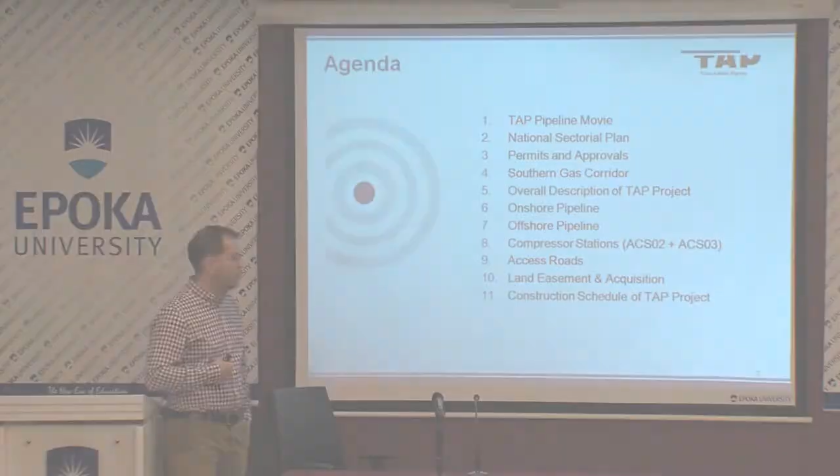I took this presentation because two weeks ago we finalized the overall compound development permit, which is the first step of getting closer to construction of the project. So it's a bit of data, I'll get you bored on this first one. The second one is more interesting because it has more pictures, which is the offshore part.

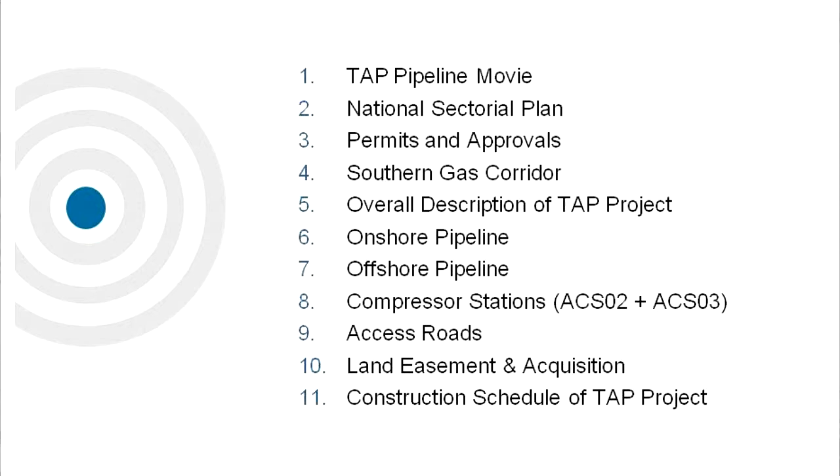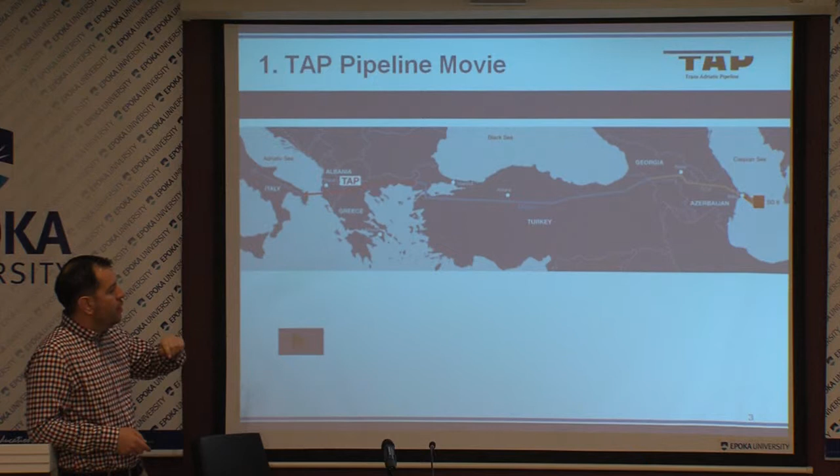So as we discussed, as I said, Shah Deniz II, it goes to Azerbaijan. It runs through Azerbaijan, through Turkey, Greece and Italy. This is what we've achieved so far on the project, which is the planning and the permitting.

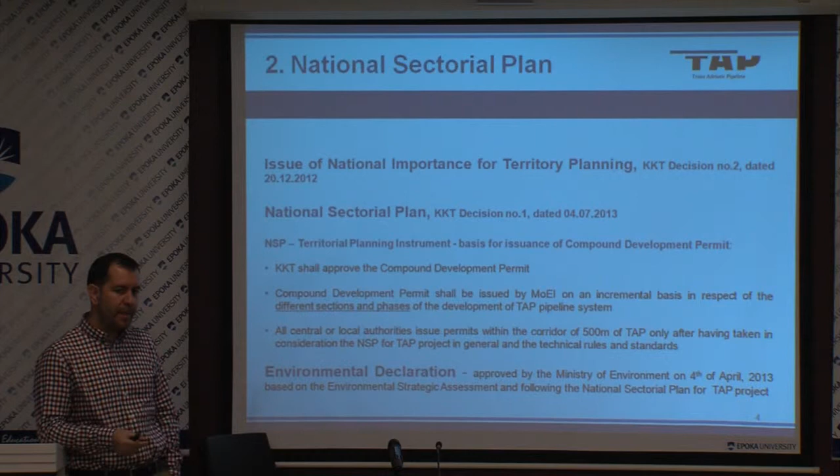You should know that in civil engineering you don't learn these kinds of things in permitting, especially because permitting is a little tiny bit where you have a construction permit, and it goes into helping you know what is the legislation in the country, what can you do in the country, what is allowed and what is not allowed, and this is what permitting does. So it's a bit of civil engineering mixed with lawyers.

This is another potential route which you guys can take in the future, because you should know that this kind of thing is in a bit of shortage in the current Albanian market and the Balkan markets.

There is more focus into the civil engineering. The civil engineering shouldn't be only civil engineering. It should have a bit more of a 3D view of it, you know, like a bit of economics, a bit of law, which, you'll see, if you have this, you are a bit different from the normal market.

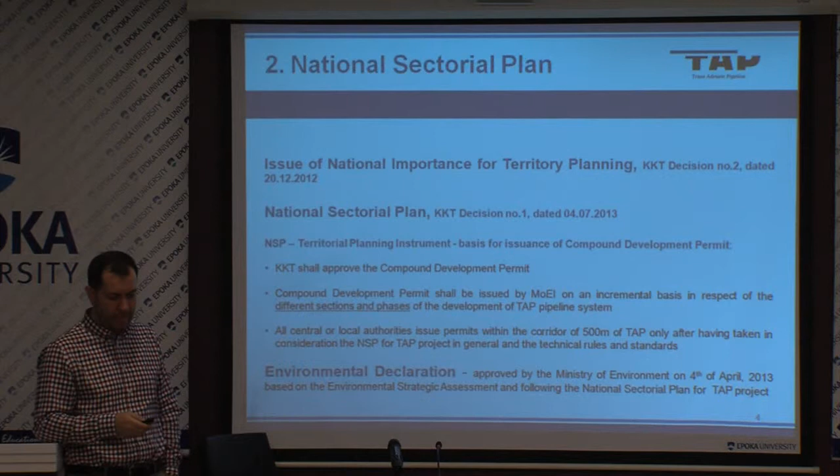This is again some permitting, environmental permit, which is quite important. Big companies, they take so much and spend so much money on environmental and health and safety, which again in civil engineering, where you are, it's not only in EPOKA, but I guess it's all universities.

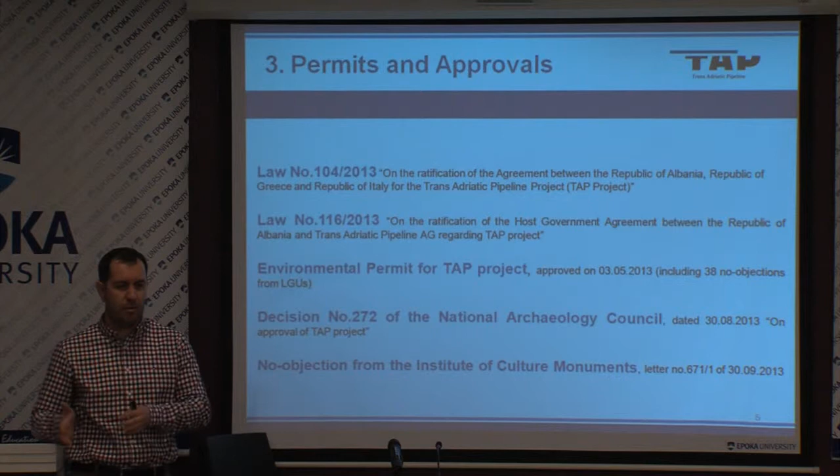Even in my university in the UK, they didn't mention so much environmental and health and safety, because they want you to be very rigid civil engineers, and they leave it up to you what you do with a civil engineering degree. So they give you the core of being a good civil engineer, but then how you mold it around to give it the shape of the real market needs, a project manager, a construction manager, it's up to you guys how you do it.

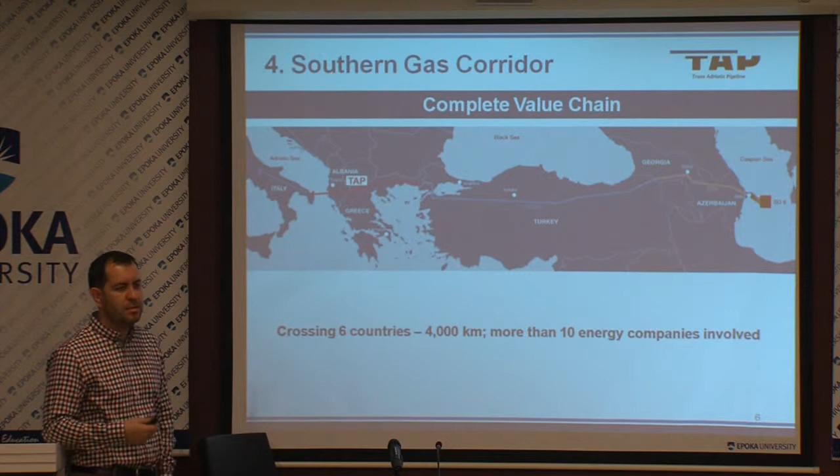So the reason why I brought this up is that this actual project is like a motorway for gas. It's not a motorway for cars, but a motorway for gas, which means that we will do all the blocking of the valves and give a go-ahead on where it stops, how we divert the gas. This is more likely, if you see it in an overview, a motorway of gas.

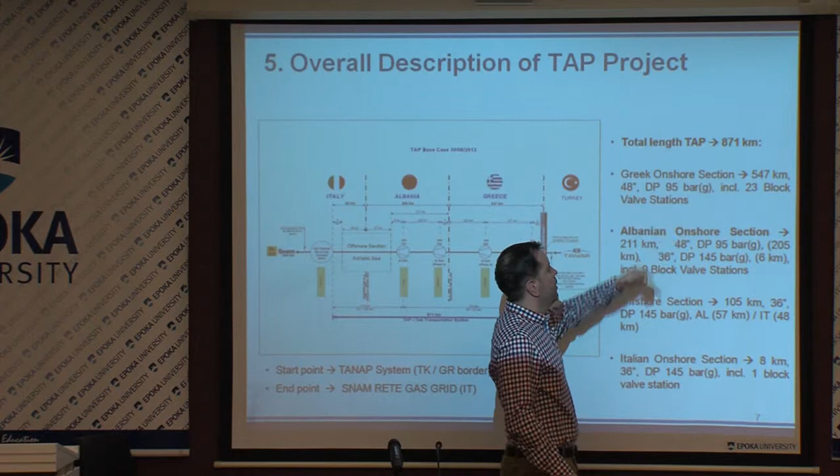I mentioned earlier that this is not only a mechanical engineer project, but is also a civil engineering one. Where does civil come into it?

Civils come into the way the pipeline is going to be placed. By knowing how much bars and what risks it has on installation or production of pipes or gas flow into the pipe, civils help to determine the bed of the pipe, which is quite important, the characteristics of it.

For example, we have selected 6 options to complete this pipeline. Out of 6, we have filtered 1 option. The reason why we did that is that we analyzed all civil impacts to the project, a good example being geological conditions. You've got to know where you put the pipes - if it's active faults, non-active faults, if it has a history of landslides and all that kind of stuff.

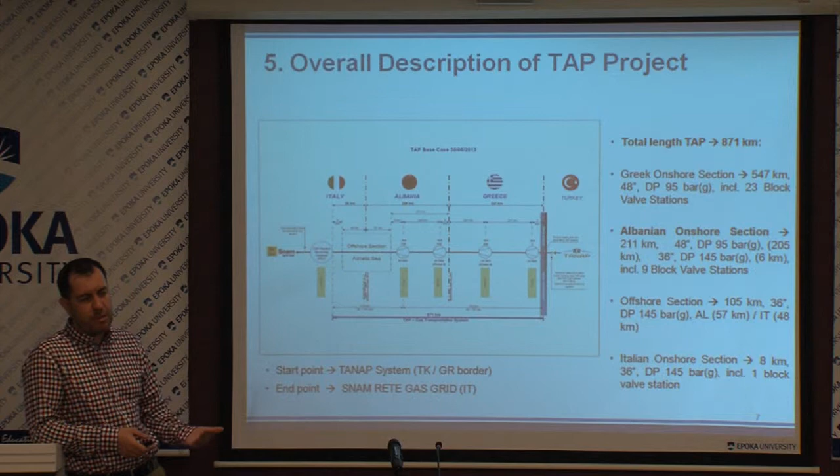These are again some characteristics about the project, basically the safety elements to the pipes. The safety element is, for example, if there is a change in weather or temperature - we have a temperature range for the weather conditions, which could be 44 degrees and up to -5 degrees.

If we have a change in temperature which is more than 44 degrees, then we put in block valve stations, which are put every 20 kilometers. What they do is, as pressure changes because of temperature, since it's a gas, a gas can change its volume depending on temperature.

These block valves will help stabilize the pressure within the valve. For example, if it's overheated, the pressure goes up, then we let some gas out of the 2 block valve stations. If it's wintertime and the temperature is -5 and it goes below that, then we call in and heat up the gas so that it has the same volume throughout the traveling from A to B.

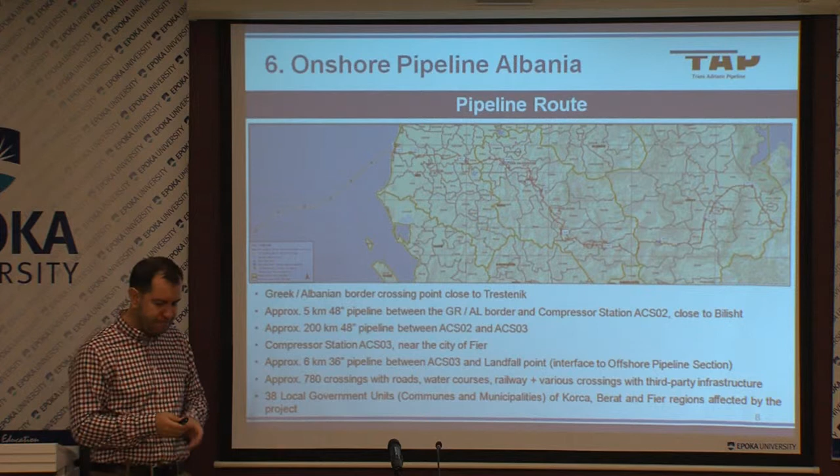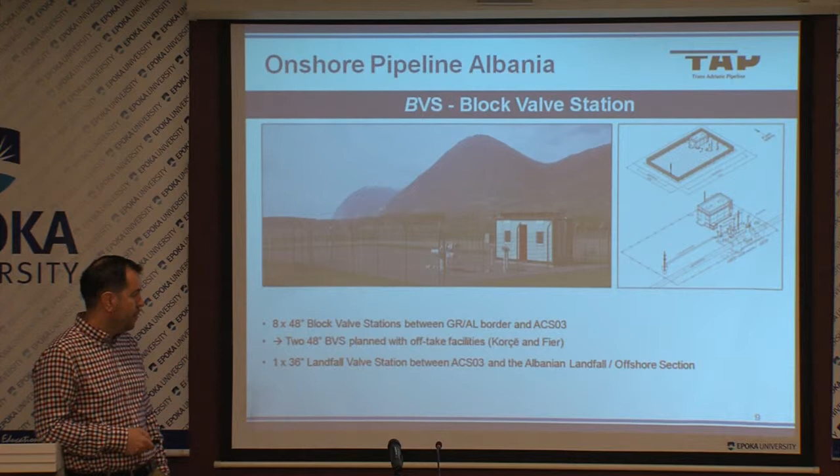Knowing that you need to do a pipeline project, you know that one of the major characteristics of a pipeline is too many pipes. What do you do with them? You store them. So again, another concept of civil engineering is the logistics behind it. If you're a good civil engineer with a road background, you could help shape up the logistics study, which is quite important because it has more than 10% impact on the overall money spent in the project.

Campsites - that's another point where civil engineering comes into it. How does civil engineering relate to it? Well, again, it's the geological condition, it's the urban study.

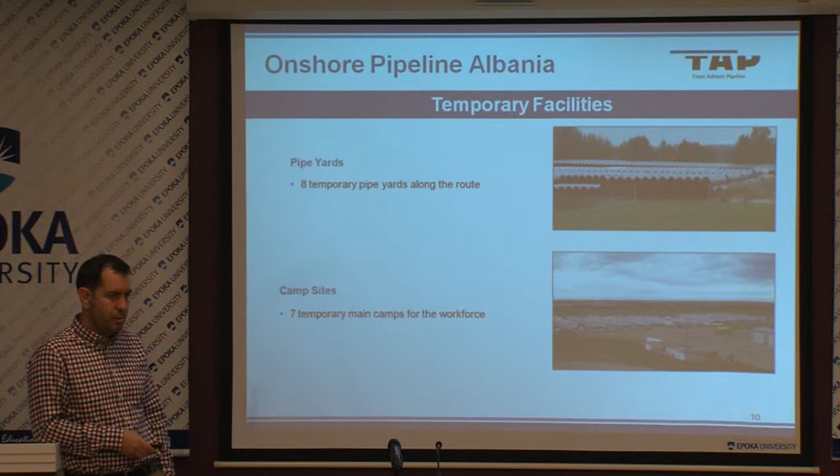How many cars will go into that area where you'll be selecting a campsite? How many people are in that village where you're going to put in a campsite? Are you affecting these people's lives? So again, civil engineering needs to have a bit more side views to the planning and preparation.

And how do you do that? You select the base case, which is you select the corridor based on all civil engineering and other aspects when you select the route.

Then you prepare it and make it nice and tidy just for the mechanical guys to come after you, put the pipe in, and then civils take over to cover it up, making sure all the risk factors are kept to where they should be.

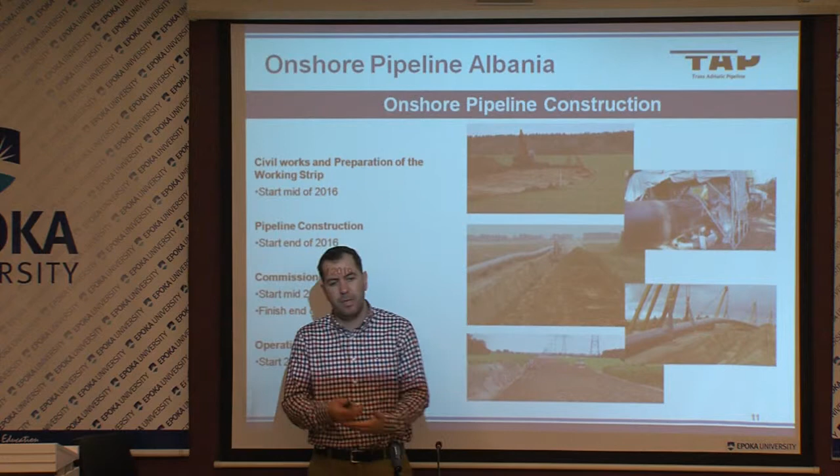Again, this is the environmental part of it. Whenever there are big projects, there are more of what we call stakeholders - people representing governmental bodies, like a directorate in agriculture, in the area, for example Korça, where the pipeline is going to go through. We need to make the project with as little impact as possible to the communities.

That means that your engineering now needs to take another shape, which means that you don't only see it as diagrams. You got to know when you put the diagrams and the design, you take into account other factors, which is community. In our case, for example, we'll have super duper engineering, but when we put the pipe in the ground, we take another turn.

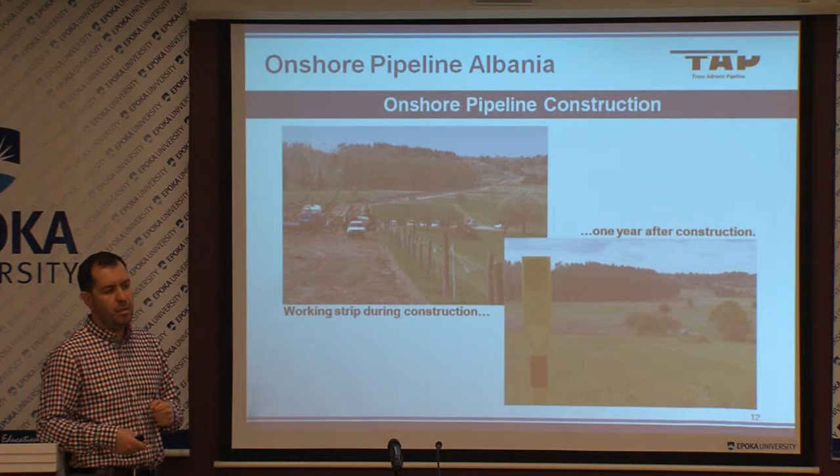We use civil engineering and we use the community liaison, because we know that this pipe is more than a 25-year project, and we want to have good community relations, because we have to do maintenance. God forbid if there's an accident, we have to take necessary measures and use the community, which are to our advantage, not our disadvantage.

Another challenge to this project, and I want to tell you something that's quite new for me, is land easement and acquisition. But I learned on the project, because you should always see yourself like a sponge, digesting and gathering more information from experienced people. We have one challenge in this project, and it is land easement acquisition.

What does that mean? It means that when you design a project, another factor is that you need to have access to this land. And how do you do that? Well, you have to buy the land or rent it out.

Unfortunately, in Albania it's the wrong example, because we have mishmash with our cadastral data, which means there are so many laws on registering your property, and you're lucky if you have your own certificate of property ownership. What we are doing is rebuilding the whole cadastre from scratch with our own money.

This affects more than 12,000 people. That's a big number, and you've got to talk to 12,000 people one by one, because you have to check whether they're the right owner or not. Why do we need that? Well, we need that because we need to construct our pipeline.

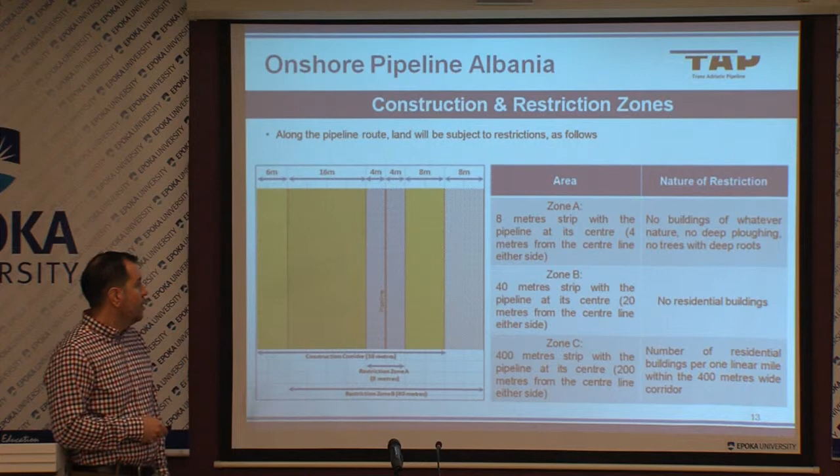This is the onshore part. Compressor stations are another factor to the project, which manage the pressure on the gas, and these help the block valves, like I explained before, to have a constant pressure in the pipeline. You need a constant pressure because if you have an irregular pressure, it means you will spend more money on maintenance.

And the maintenance in a gas project is quite expensive, because the pipes on their own are expensive, the welding on its own is expensive, the installation on its own is expensive. So imagine you will have to do this whole circle again if something goes wrong with the pipes. And normally the lifespan, when engineering considers the lifespan of the project, normally

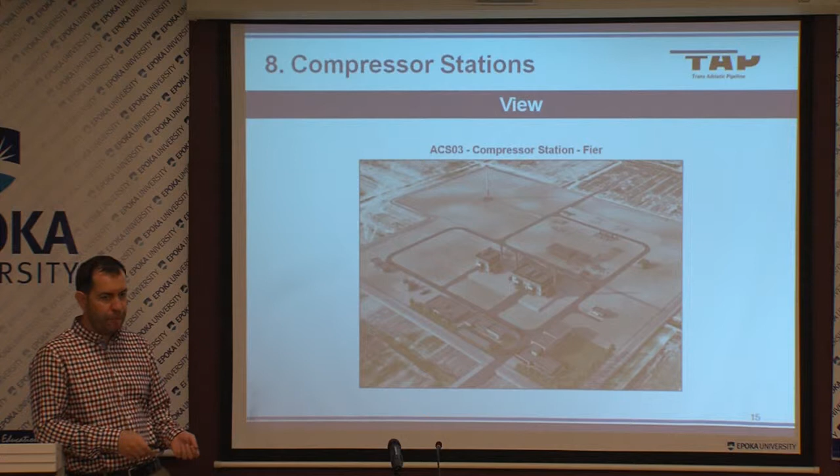this type of project will go for more than 25 years. The engineers who design these kinds of projects, it's their duty to match the quality of the material selection, the type of construction, and natural causes such as rainfall, for example, and heat. All these elements go into the design and give you a final product, which is a pipeline for 25 years plus. So this is what you'll be doing one day. You never know.

Before we construct, there is a logistics part of it. Especially in a developing country like Albania, there aren't many roads where we can take the pipelines. We are talking about pipelines 18 meters long, which would need a typical truck of 22 meters, and they would turn into roads with a radius of less than 5 meters. This is a big challenge.

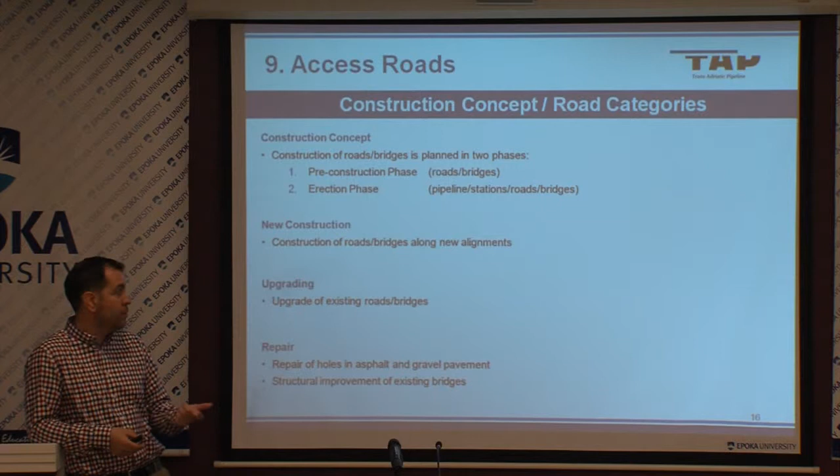What the company has decided and taken into calculation during the design phase is that this is our cost, because it has a direct impact on how fast we can progress with the project and how fast we can construct it. So what we are doing is designing roads, more than phase one, more than 194 kilometers of roads which we will upgrade and renew.

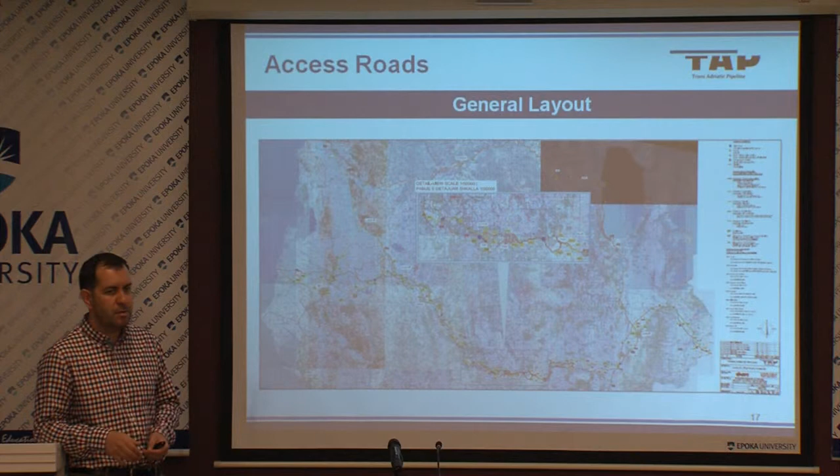There are existing roads right now with a width of less than 3 meters, used by farmers with little tractors going to the farmland for day-to-day business. But these are not enough for us. We need more than 5 meter width. So it's our cost - we have to design them based on geological and other conditions, and make them fit for purpose for our project. In total we have 57 kilometers of new construction, and 44 kilometers which are existing, so all we need to do is make those good for our logistics purpose.

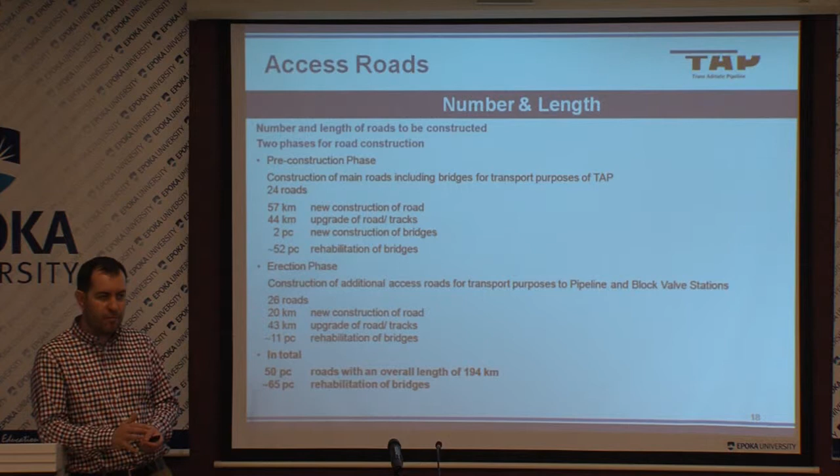On the way we noticed that some of the bridges we'll cross are not enough to withhold our tonnage - a typical 22 truck is 40 tons, not the average truck you see on Albanian roads on a normal day, which is normally 22, 25, 30. So we have extended this design scope and will add another 52 bridges, rehabilitating them to make them good for our purposes, and then once we finish, we will give them as a gift to the government.

On top of it, we will go through 655 kilometers of roads we will use. This is a basic estimation. So these 655 kilometers that we will use, we have put them under a monitoring regime. We will do an initial assessment of the roads from a civil engineering point of view. We will go back to the road authority and tell them: look guys, this is the condition we found them in. If we damage them, we will maintain them and put them back to the previous condition they were in.

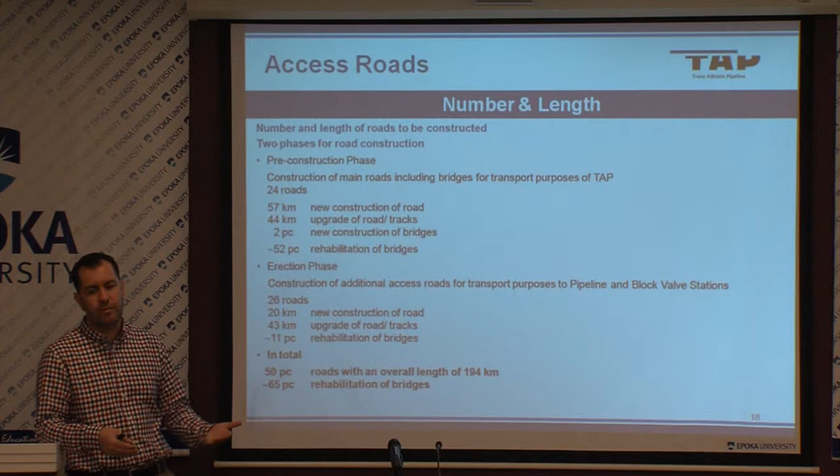This is a typical road design that you should be encountering in your life after university.

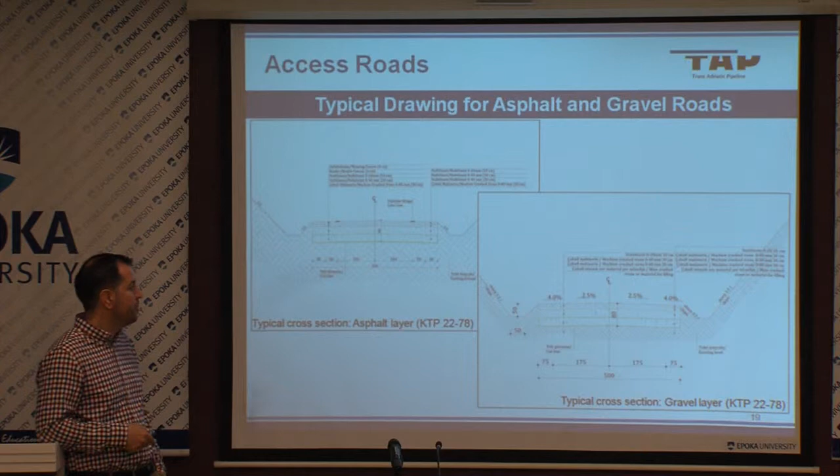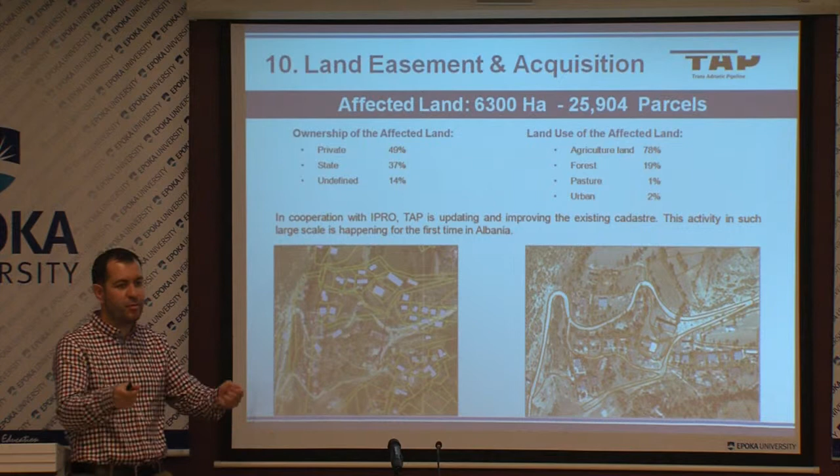These are our time schedules.

As you know, being an engineer, there are three main subjects encountered, and I would say these are just the principles of any discipline in engineering: quality, time, and cost. These are like a triangle. You're lucky if this triangle is...

So you always have to make sure this is in line with all the tasks given to you, which has an impact on the overall project. Typically, for example, it's the designer of the roads - we gave our designers a timeline for when the roads need to be finished based on when construction of the main pipeline will be finished. So what the designer does is pick the deadline and work backwards, doing all the planning, geological and other studies, environmental, hydrological, you name it, until he reaches the deadline and hands in the project to us.

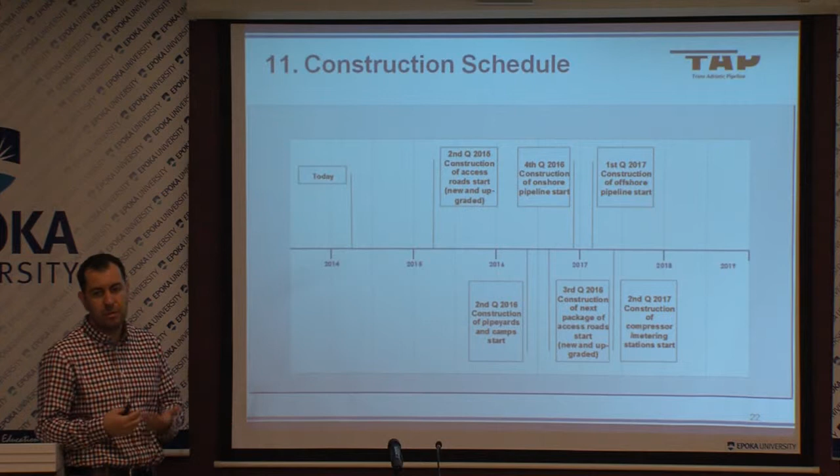Normally in a normal working way, you always see that the time schedule will always change. Planners, some of whom come from a civil engineering background, always plan with a buffer zone. For example, if the deadline is third quarter of 2016 for the next construction phase, officially that's what it tells us, but in his head the planner has reserved a quarter extra, because the world is not perfect. We know there are delays. All these filters within a company - a planner, an engineer, a designer, a project manager - match their efforts so the project can be delivered in time, within budget, and within the requested quality.

Now I'm going to show you the offshore part, which is quite interesting. The onshore has many unknowns, but these are foreseen unknowns. The offshore is more challenging because it has unforeseen unknowns during the design phase, and these details could go up to the salinity of the water.

How much salt does the sea hold when you select the pipes you want to install? Is there any active faults in the seabed? How deep will the pipe go? I don't know how much fish movement there is. These are even ridiculous things, but they do take them into account, because these are all factors which should be considered when you design a pipeline.

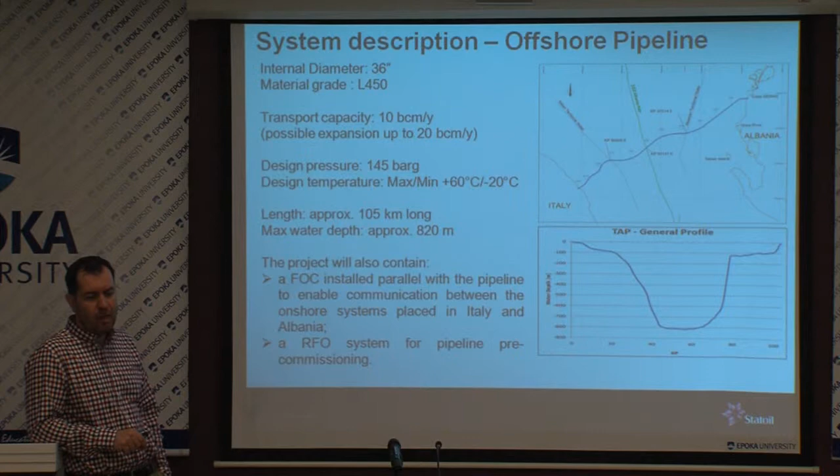The way we install the pipe is with a normal steel pipe which has a smaller diameter than the onshore part. Why do we do that? Because we know there is much more pressure when you go down, and our depth is more than 820 meters deep. This is close to Otranto Bay, if you are familiar with it.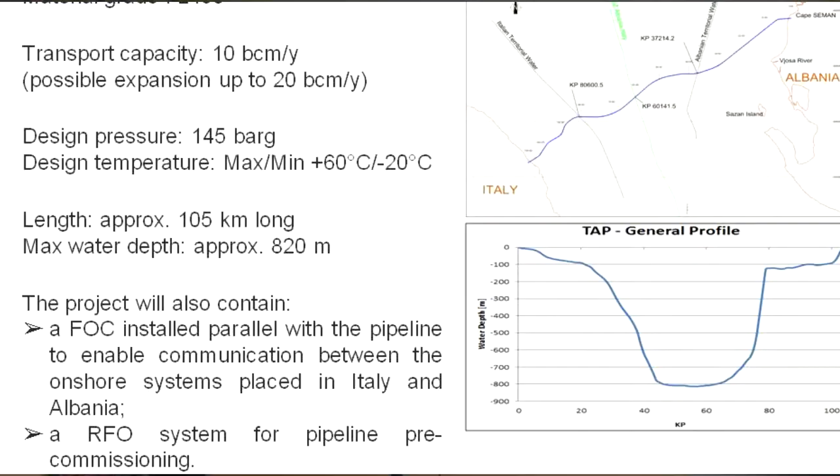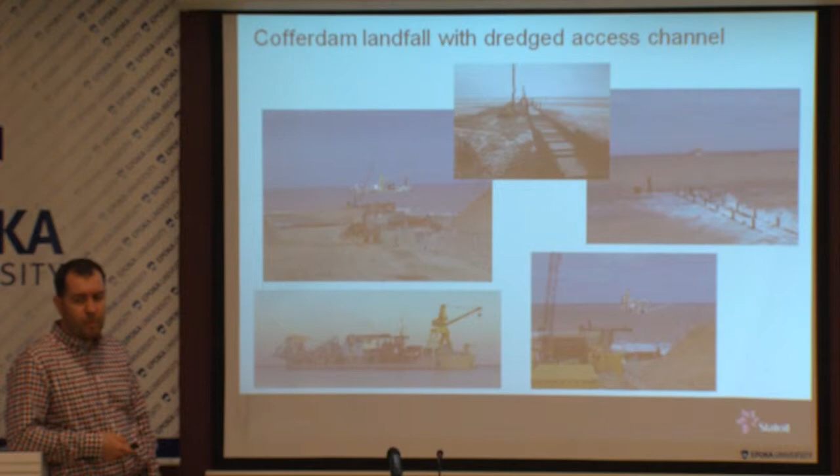We install the pipe and coat it with a concrete cover, which I believe is 25 millimeters, so 2.5 centimeters. This is special concrete, because the pipe has to sit on its own on the seabed. We will not make any clamps onto the pipe, so it stands on its own.

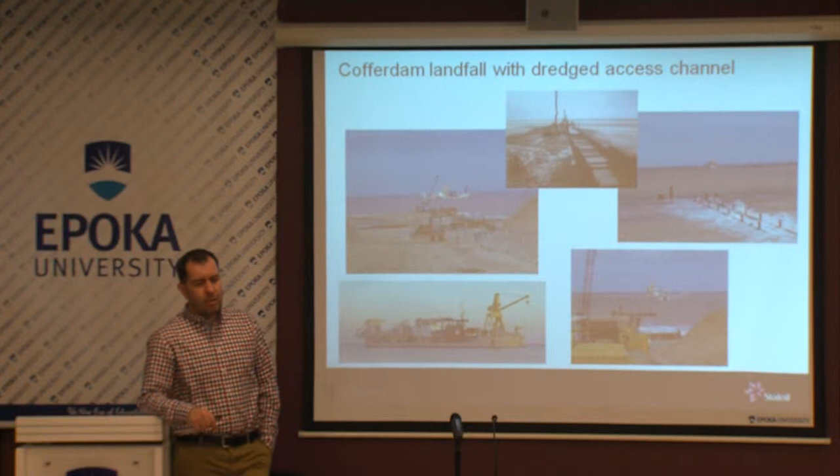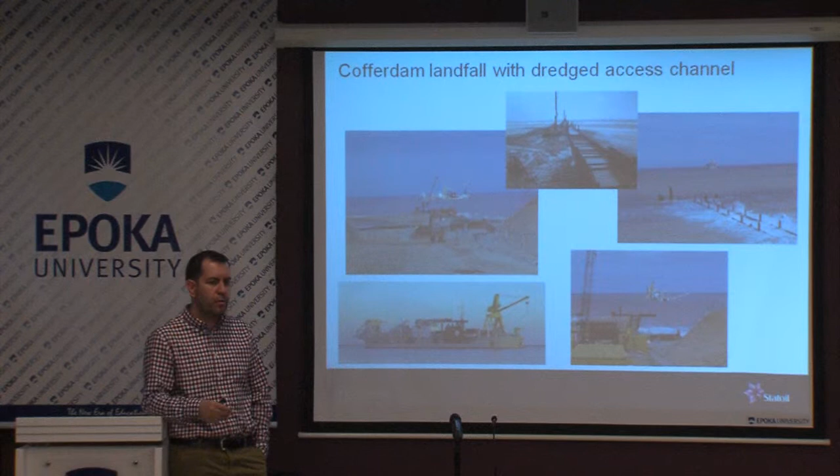This calculation is made in a way that it will withstand all the unforeseen risks, such as water currents. Water currents are quite known in seas and oceans, you name it. We are quite lucky because we don't have many. That's why when we take the design measures, we take into account even water currents, but at a lower risk than if the project were in an ocean, which has much more currents.

And how do we do it? We go up to Seman, which is close to Fier - it's a nice beach area. The pipeline, before it goes into the sea, is stored in a place called landfall. What is the landfall? This is a connection between the water and the ground, the onshore with the offshore.

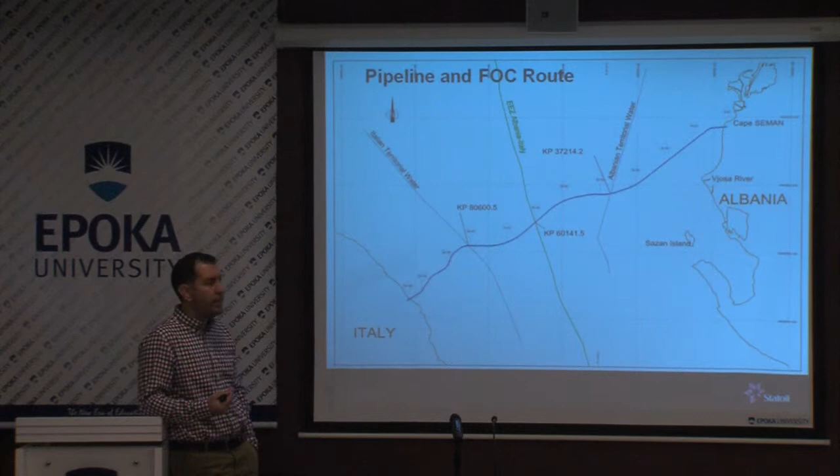The connection is made by a methodology called cofferdam. As you see here, you have steel sheets installed in the ground with a corridor of 4 to 5 meters width, where people and machinery can work within the corridor. This goes into the offshore - in our case, 400 meters - and then into the sea with a natural gradient.

The sea has many different natural gradients. We have to reshape the gradient so the pipe has enough gradient to stimulate free flow. You have compressors, you have block valves, but going back to engineering design, the best thing is free flow - there's nothing better. Less maintenance, easy to design, easy to install. But because of the geological and earth conditions, we have to have parts where we have to stimulate the flow of gas.

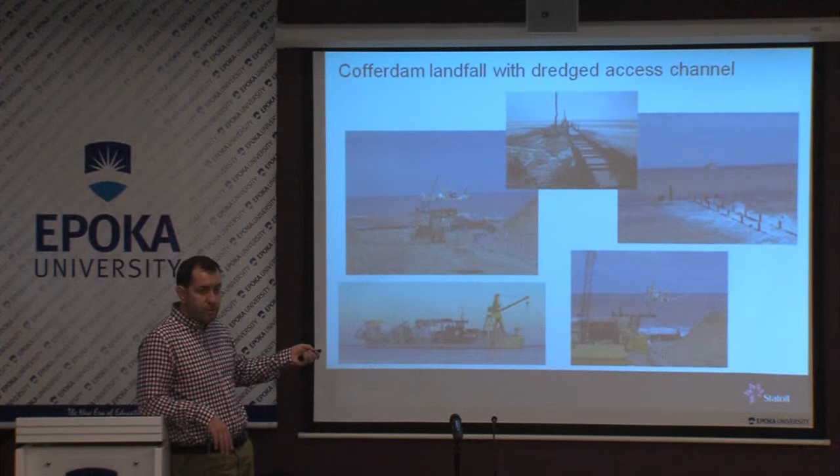Then the pipe goes into the sea with a natural gradient. To achieve the natural gradient, as well as installing the steel pipe, we have dredgers - this is typical. What dredgers do is take out the unnecessary seabed to accommodate our pipe. This is where civil engineering comes into it.

How does civil engineering come into it? Well, the landfall needs to take into account shear forces, how much pressure there is from the sea, how much free water there is from the sea when you do the cofferdam, because this will calculate how much time you have to work.

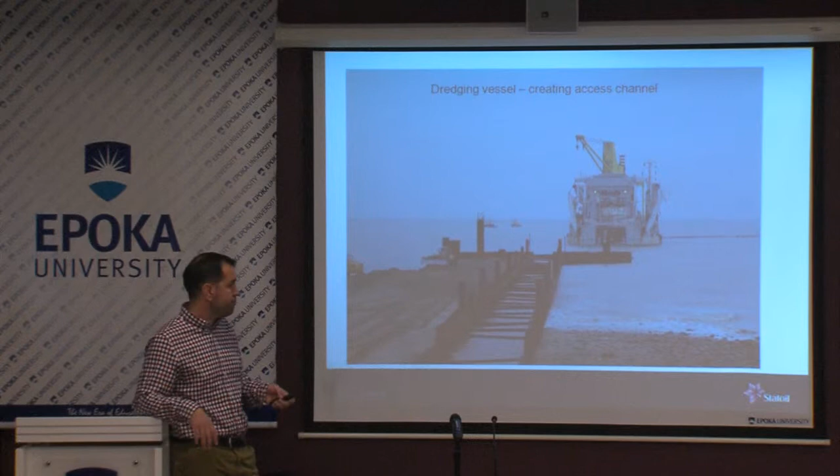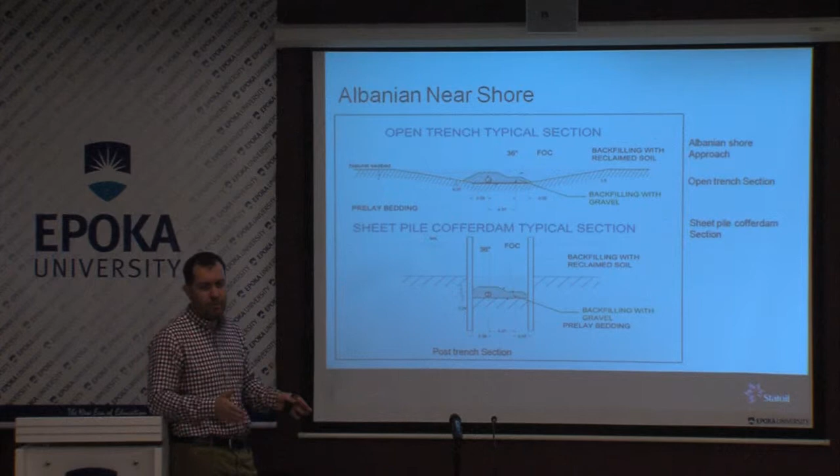In order to have controlled maintenance, we put a fiber optic next to the pipeline. The purpose of the fiber optic is to monitor constantly, hour by hour, minute by minute, the behavior of the pipeline based on natural impacts, because there will be natural impacts to it. So we will design the pipe, and then design fiber optic next to it, which we will use for our own purposes to measure and raise the alarm if there is anything wrong with it. Then we can use the block valve mechanism to stop the free flow of gas, do the inspection, and then put gas back into it.

This is a typical dredger. This actually will be in Albania, and as you see, it's like a little city with all provisions into it, including a helicopter pad for health and safety purposes. If there is any injured people, we put them in a helicopter and take them out, either to the country's hospitals or outside of Albania.

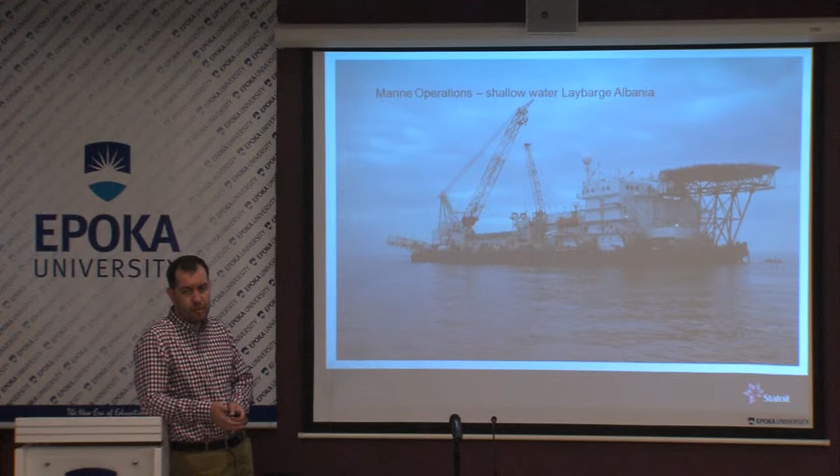Now we've done all these arrangements, and how do we do the installations? We've made all the preparation, but how do we do the installation for the pipeline? What we do is install the winch before the landfall, and then the pipes will be delivered on a big boat on the sea. All we need to do is connect the winch with the ship, put a string in, connect the boat with a string, and then deliver pipes from one end to the other. What this winch does is pull all the pipes into shore until we slowly and gradually give over the operation to the offshore installations.

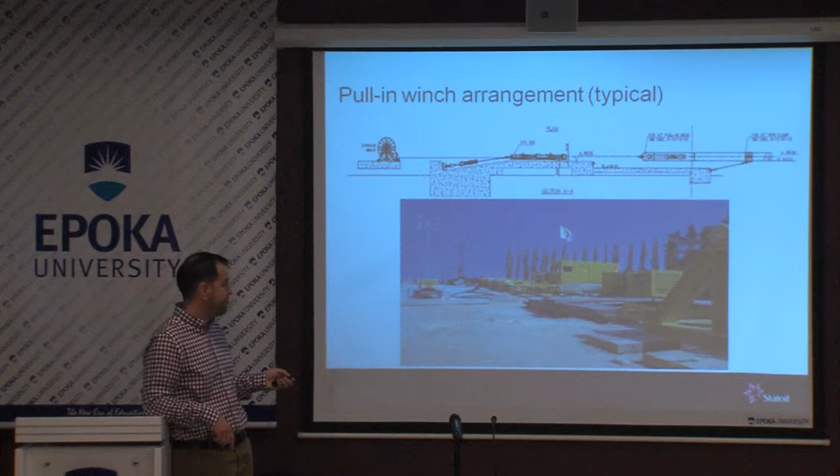This is it, this is what it will look like. This is a temporary, not a permanent platform. All the installations will be done on the boat, from delivering the pipes to the welding, and to slowly dropping the pipes onto the seabed.

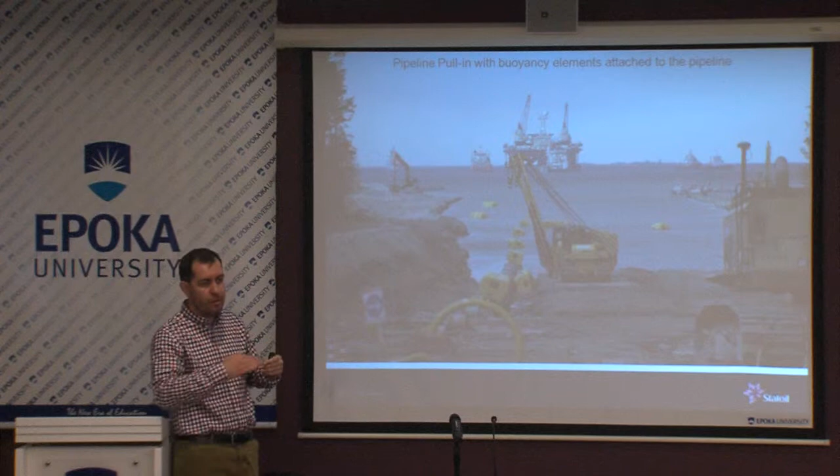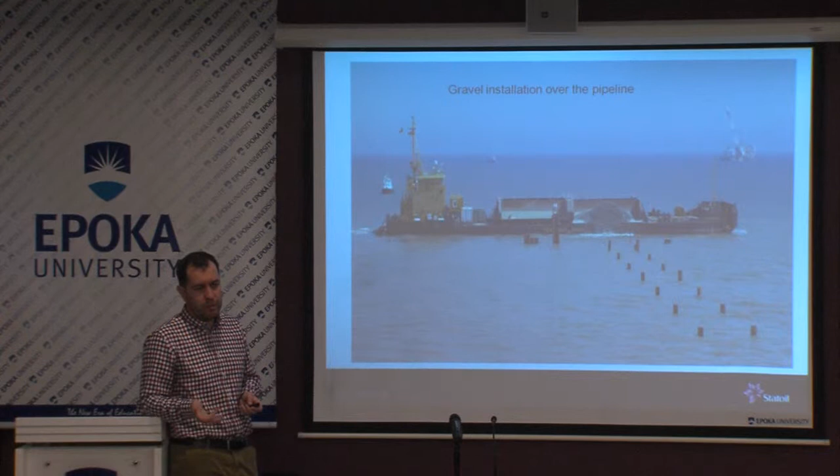This is the gravel installation. Again, if there is more sand, we'll use dredging. If there is less, we'll use our own backfill, and most of the time we use gravel, where we shape the bed where the pipeline will fall, and then fill that bed with normal gravel or special gravel, depending on the quality of the water where we are installing the pipe.

This is a typical installation boat. This is the landfall now, we finished the onshore part. All the operations from then will start offshore. There is a big boat which normally can hold more than 2,000 pipes. Everything is like a mini warehouse, but it's all at sea, where you have quality checks, welders, testing and commissioning. Everything is done on the offshore boat, and then it's gradually released onto the seabed.

This operation covers a length of 114 kilometers from Albania to Italy, to Brindisi. I'd like you guys to guess how much time it takes to install this. Less, 2 months. It's quite good, I thought it was 1 year as well, but it's 2 months maximum, about 2 kilometers per day. Normally a typical boat like this does even 5 kilometers per day, so it's quite fast. This is the most important and expensive part of the project, and it's only spent 2 months.

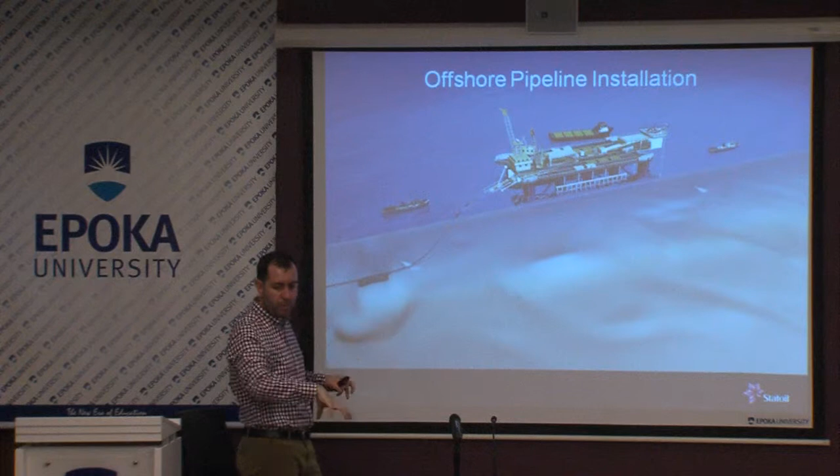What about the tubes, how are the pipes delivered? If you see that boat over there, they're delivered from the warehouse, dumped into a different boat, and then brought into our warehouse, where everything is well organized. Asking about the pipes being affected from these waves, the dropping of the pipes.

Yeah, this is again engineering, we have taken this into account. This is why we coat them with concrete coating, which can vary - I think it starts at 2.5 centimeters, and can go more as the depth increases. What this concrete cover does is hold the pipe in stability and minimize movement due to earthquakes, water currents, you name it.

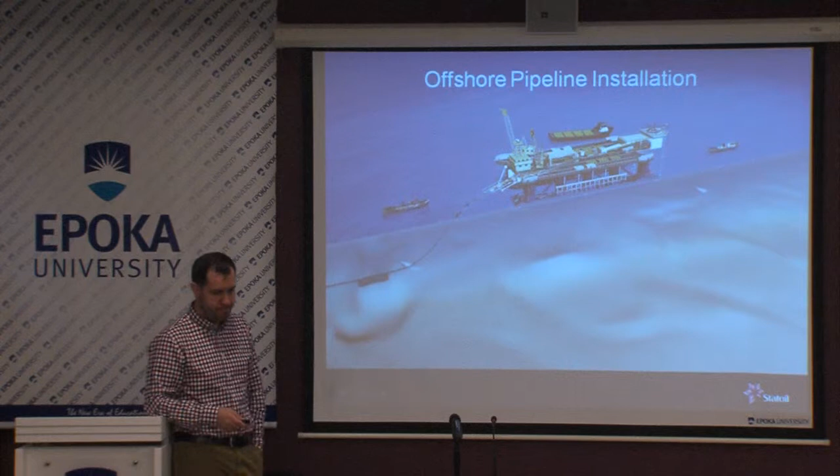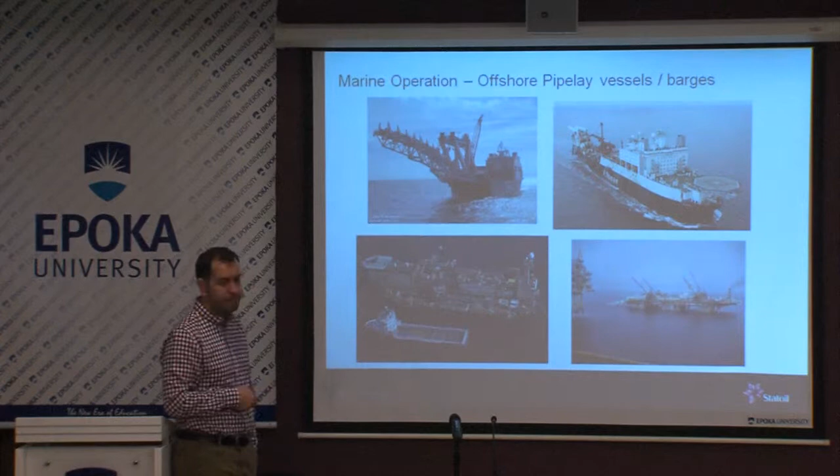And these are the big boats that are coming to do the installation. This actually is in a cartoon version - this is the real version of it. I think this is it from the project point of view.